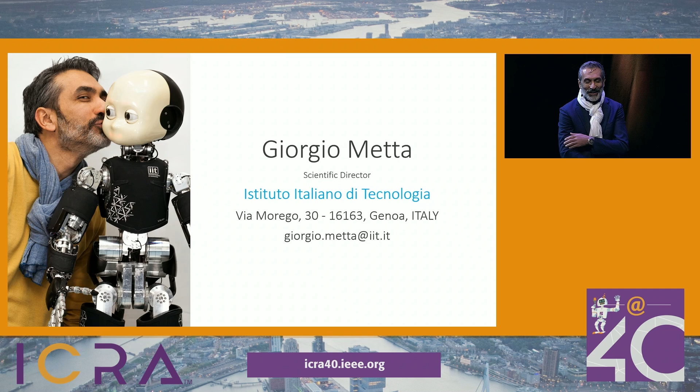Let me start with a bit of history of my work. I'll be quick. It all started with a European project called RobotCub, which allowed us for the first time to dream about designing a full humanoid robot. The project started in 2004, so this very moment is 20 years since we thought of designing a humanoid to use for research.

This was the result: a full humanoid, tons of sensors, enough degrees of freedom, hands, and the possibility of interacting with the environment, interacting with people, and measuring the interaction. There's a Ferrari logo there, not because of any relationship, but because we like to think of our robot as a Formula One car — not because it's particularly fast, but because it breaks after every Grand Prix. So every single experiment, you have to fix cables to repair the robot somehow. But that's a research platform, and that's the burden to researchers.

Now, my contribution to this talk finishes here. Everything else is work from our PIs at IIT who have taken the legacy of this project and carried out research in different fields.

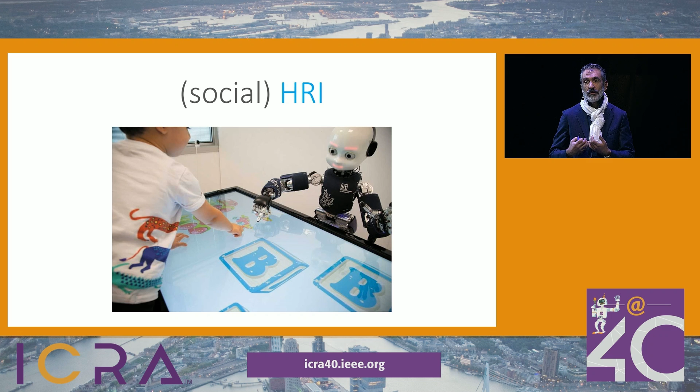We put together an experiment. Unfortunately, or fortunately, it was during COVID — it was a bit of a nightmare to actually carry out the experiments. But on the other hand, it allowed us to spend time with the kids, to really entertain them in interacting with the robot. We collected a large amount of data, and I can show you basically what we did.

We designed an experiment to try to teach the kids perspective taking. This is a skill that is not necessarily developed by the kids autonomously, but if you teach them, in this case using the robot, they learn and improve on the specific task.

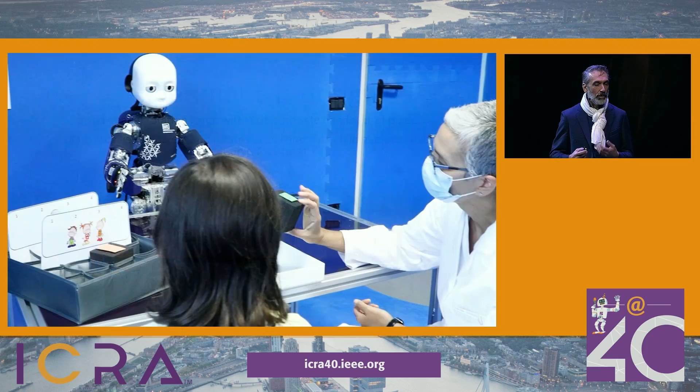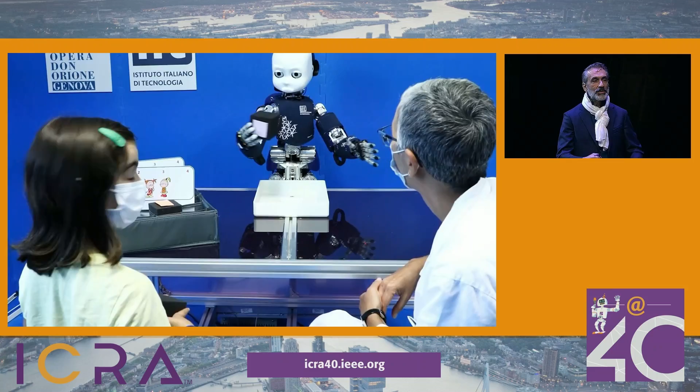By the way, these people are actors, not the real subjects. You see basically the experiment: there's an interaction with the robot. The robot is manipulating certain cubes. The cubes have letters, drawings. The kids have to guess what is the perspective of the robot — what the robot is seeing during the play.

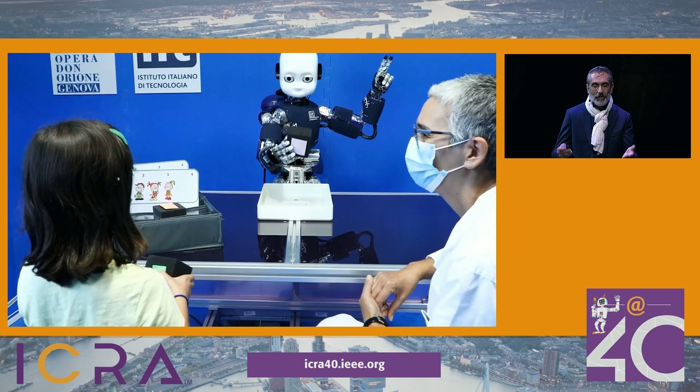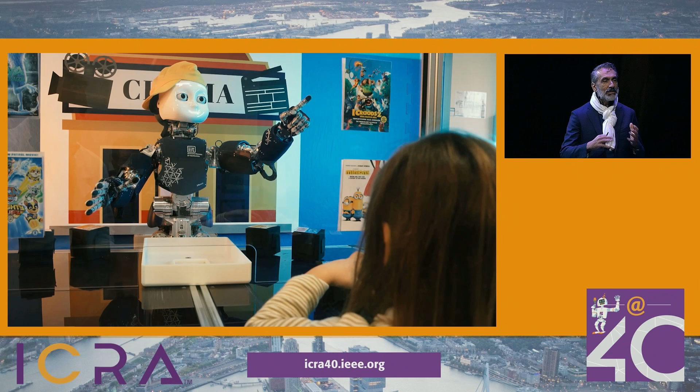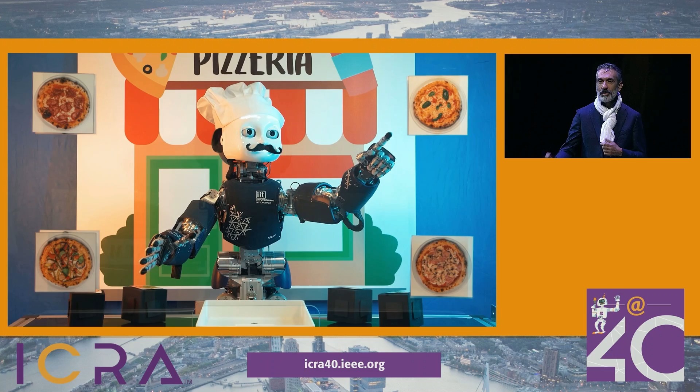This wasn't enough, so we put together another experiment, similar concept, a bit funnier in a sense. The robot is pretending to be in a scenario — here the kids are ordering pizza rather than going to the movie theater. There's some interaction there too, but basically the experiment is the same: again cubes, again selection of different objects and viewpoints, all epitomized by the interaction through the cubes.

Here we did a slightly more sophisticated experiment in the sense that we wanted to test a couple of things. One, that learning is actually effective, but also lasts long enough. The other thing is we wanted to check whether, if we did the experiment with a human control — replacing the robot with a human — what happens? Is it the same, or do we measure a difference?

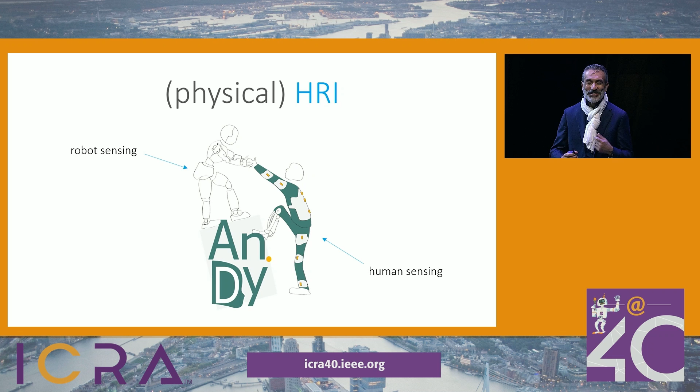Here, what we did was first assume that a person can be modeled like a robot, using the same dynamical equations basically. It's not true, but we approximate it that way. So once we have a model, we need two things: to estimate the parameters and to actually measure the state of the person, so we can plug that into the model, do some prediction, and feed it into the controller.

What you see here is actually how we do the measurements. We have joint sensing, that's easy - we have a sensorized suit full of gyros and accelerometers that can estimate the configuration of the body. We also have tactile and force-torque sensors in the shoes to measure some forces - not everything, but good enough for certain interactions.

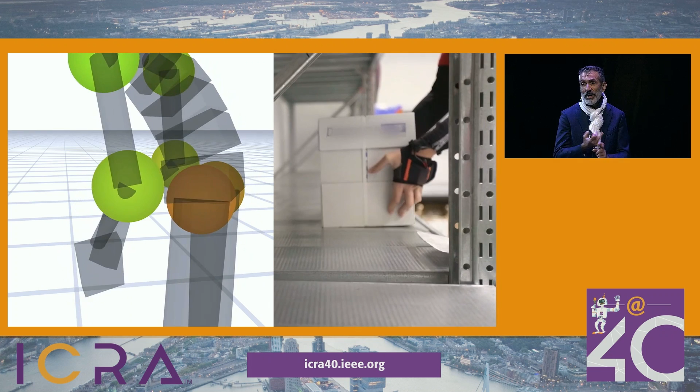What we can do is equip people with this type of sensorized suit. As you can see from the plots, we can measure both the configuration of people interacting with objects and also their joint torques, which is important for measuring muscle fatigue, joint stresses, and so forth.

Once we have this measurement, we can design controllers where everything is modeled with the same type of equations - the dynamics of the human, the robot, which is easy to measure and calculate, and also the interaction forces. So we can build controllers that implement something like this.

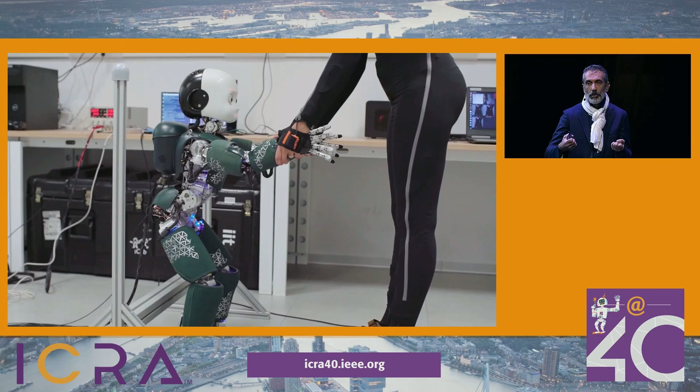It's difficult to see in the video because feeling forces through vision is a bit difficult, but believe me, the robot is very naturally following what our researcher in this case is doing - pulling - and the robot stands very naturally, minimizing the force that the person has to make to lift the robot.

Why is this important? Well, once we have the sensorized suit, we can actually control a robot remotely. This is something we did at ICRA two years ago in London - one of our people in Genoa maneuvering the robot, and at the exhibition we were playing with different robots, all teleoperated.

Here, the nice thing is that once you model what the human is doing, you can also compensate a bit for the delay that naturally occurs when controlling such a long distance.

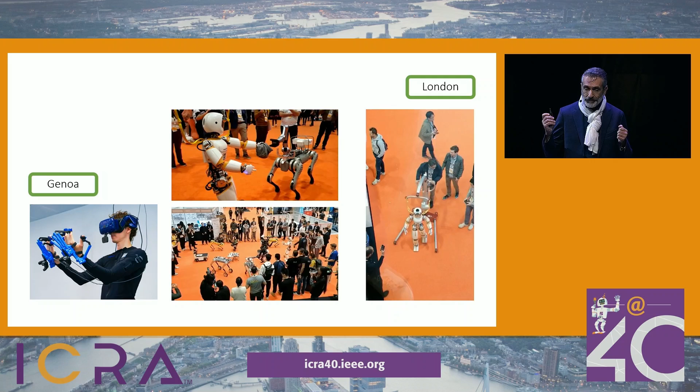Last but not least, what we can do with teleoperation these days is collect data, and this becomes extremely important for training deep learning models. This is an example, very crude in a sense, but we basically went through a task for a number of minutes, collected data, and trained a relatively large neural network that includes vision and all the movement data and forces of the robot.

We reproduce the situation for the robot, and the robot behaves and adaptively follows a bit the task it was actually trained for. It's kind of nice, and we're now in the condition to collect enormous quantities of data and train models very, very easily.

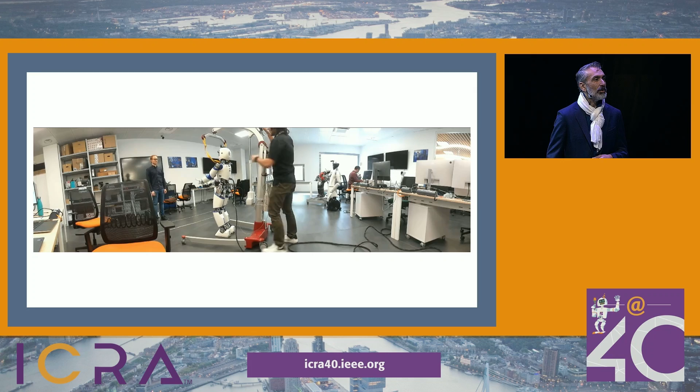Let me finish here. Thank you very much, and I'd like to say thank you also to the PIs who worked on these experiments: Agnieszka Wykowska from IIT, working on human social robot interaction, and Daniele Pucci, working on the controllers and the teleoperation. Thank you very much.